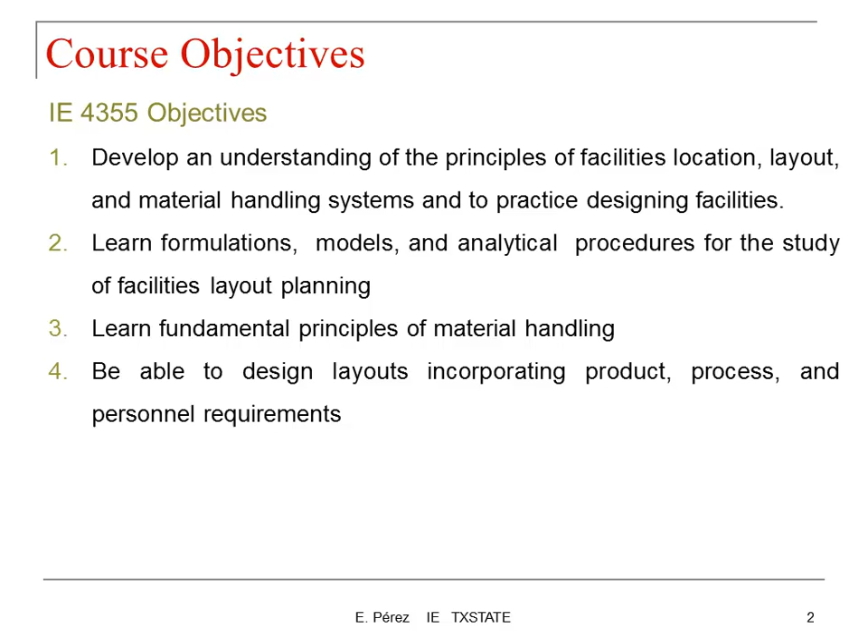So understand the principles of facility location, layout, material handling systems, and to practice designing facilities. Learn formulation models and analytical procedures for the study of facility layout planning. And learn the fundamentals about material handling and be able to design layouts incorporating product, process, and personnel requirements. So as you can see, our topic today is very related to that objective.

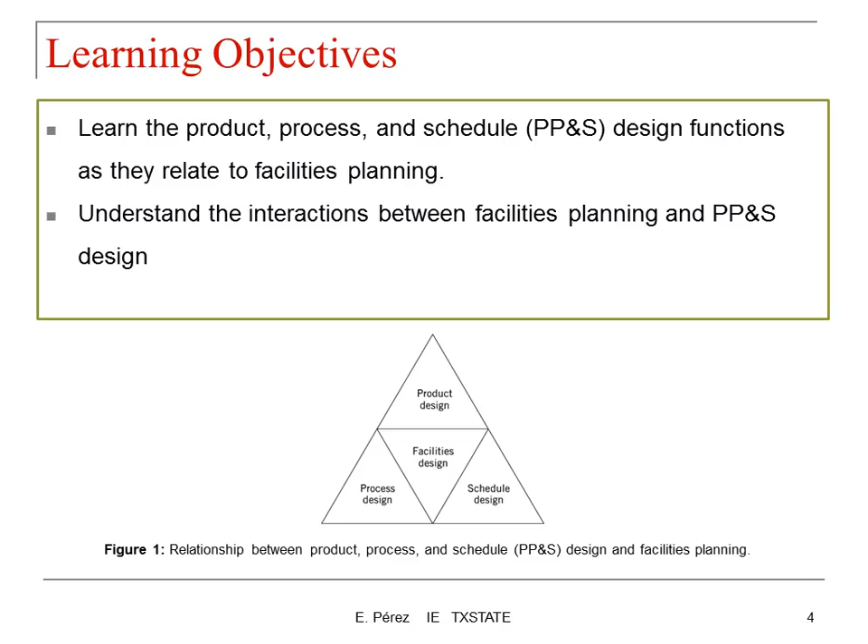So if you see this, that means product, process, and schedule, as they relate to facilities planning, and understanding the interactions between facilities planning and the product, process, and schedule design. So let's start with the product design.

So the product design involves two things. The first one is to decide which products are to be produced, and the second one is the detailed design of individual products. Okay, so these two things are related to the product design, and I'm showing here one CAD design for a cell phone. So we're going to talk about that later.

Decisions regarding the products to be produced are generally made by upper level management. And if you took project management from me or from Dr. Jimenez, we talk about this in detail in that course. Why are these decisions made by upper level management, and how are they involved in this decision making?

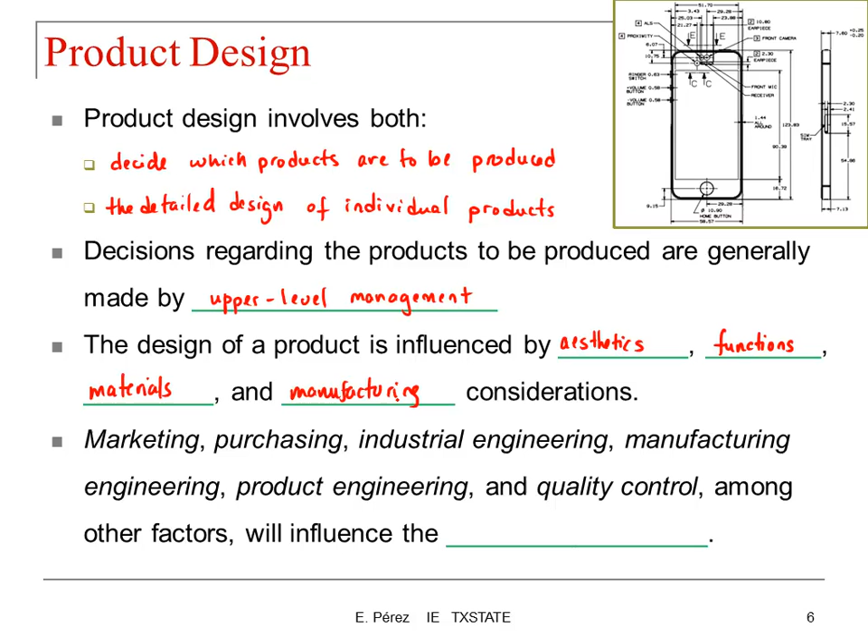That will influence how the product is produced, and can also influence how many units you are going to sell. If you are able to provide a good design in terms of aesthetics of your product, that will be easier for you to market, for instance, and so on. So marketing, purchasing, industrial engineering, manufacturing engineering, product engineering, and quality control, among other factors, will influence the design of a product.

So I want you to keep in mind what we are trying to do. We're going to be building from the building blocks up to the top level. So we want to show you how the product design, the process design, and the schedule design affects the facilities planning.

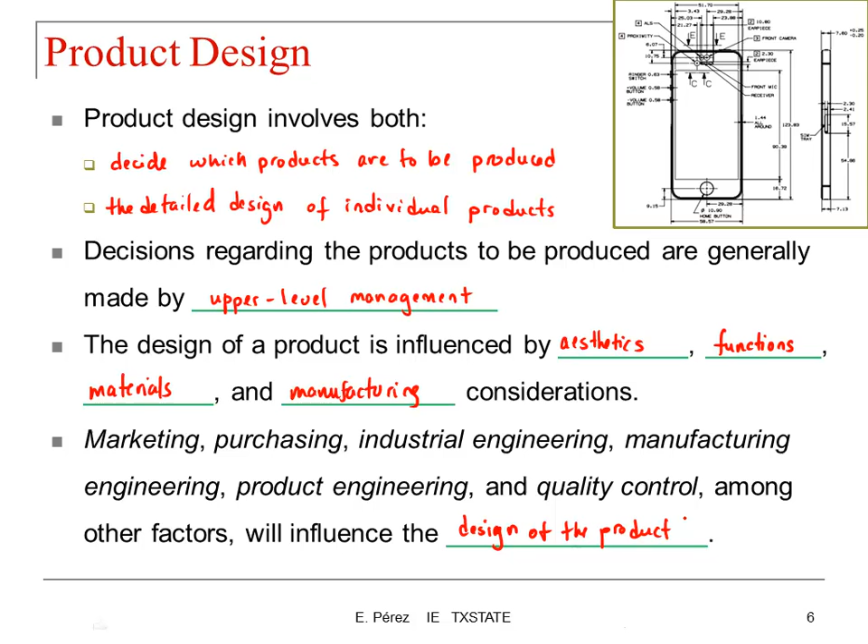In terms of product design, we can use pictorial representations and prototypes as inputs for the facilities planner. Here is an example of a drawing or pictorial representation of a particular assembly. As you can see, it's very detailed in terms of the part numbers needed to get that particular product completed, and the picture also shows you how the product needs to be assembled.

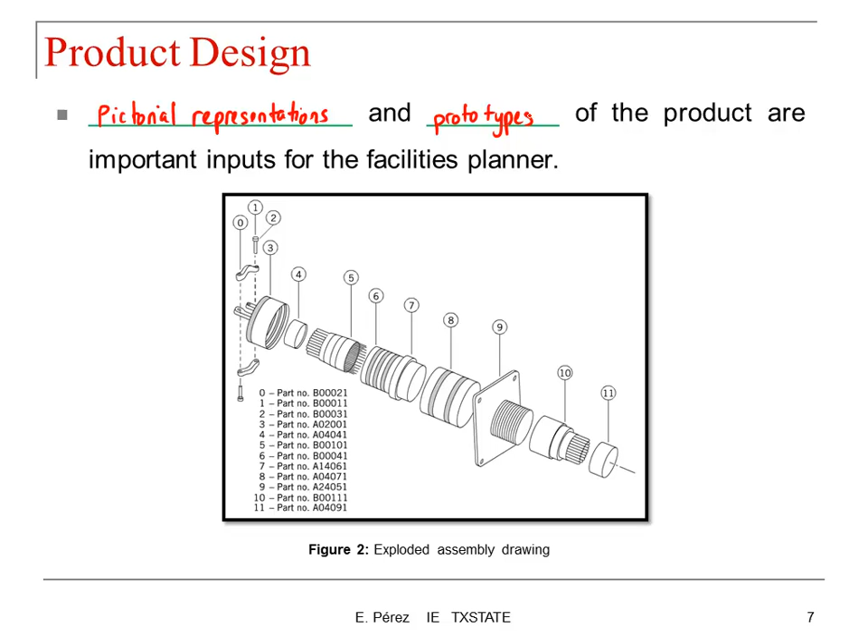Okay, so these are some of the tools that we can use. Also, photographs and drawings allow the planner to visualize how the product is to be assembled. So if you would like to see how the product itself is going to look in reality, you can also produce this type of picture for helping in the assembly of the product.

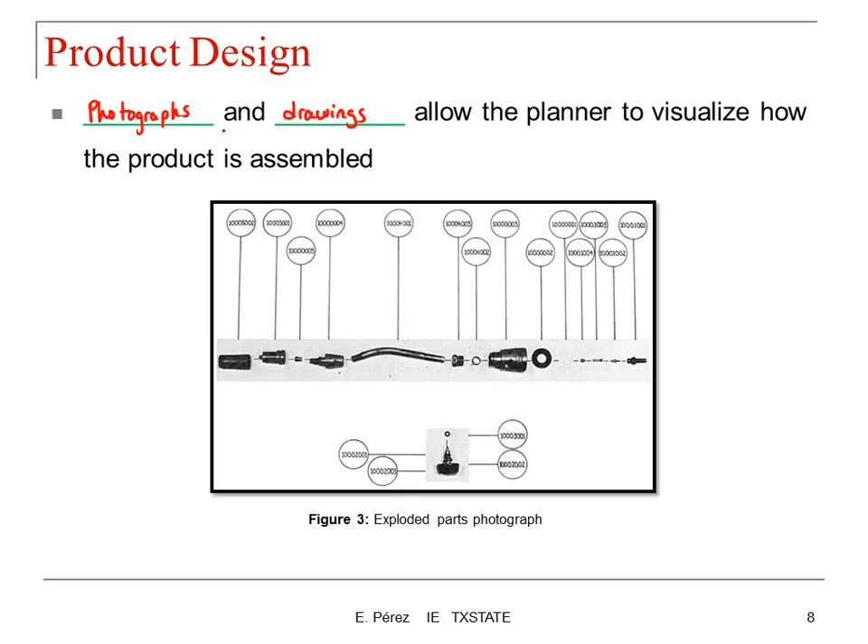As you can see, we have multiple components in order to put together this whole assembly. So detailed component part drawings are needed for each component part. Here we have 1, 2, 3, 4, 5, 6, 7, 8, 9, around 10 different components. So we also need a specific design or drawing for each one of those components. The drawing should provide part specification and dimensions in sufficient detail to allow part fabrication.

One of the decisions you have to make as a facilities planner - you saw that for this particular assembly you have 10 components. You might be able to produce some of them, you might be able to produce all of them, but sometimes you have to make decisions in terms of whether it's better for you to buy some of those components or to manufacture those components. We're going to talk about those details later in this lecture, so just keep that in mind. The combination of exploded assembly drawings and component part drawings fully documents the design of the product.

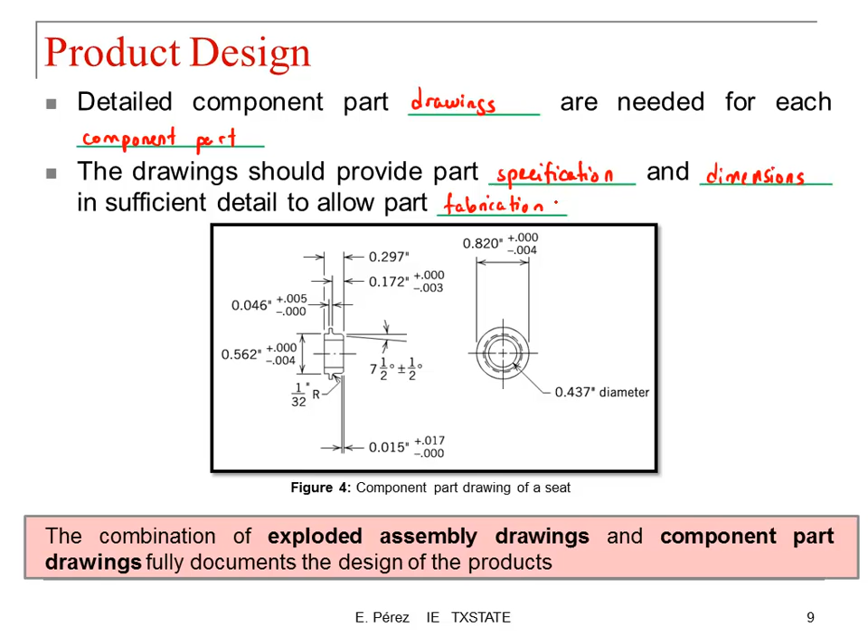Any idea how you can create this type of diagram? I don't know if any of you have experience designing or creating these diagrams using a computer. Yeah, I guess so, right? Because you take one course at the beginning of your degree that teaches you how to use CAD software. So the drawings can be prepared and analyzed with computer aided design software. When I was an undergrad student, we used AutoCAD. I don't know if that's what you're still using, but you can use AutoCAD to create these components.

Concurrent engineering can be used to improve the relationship between the function of a component or product and its cost. We talked a little bit briefly about concurrent engineering in our first lecture. Basically, instead of following a sequence of steps, you're trying to combine some of them so you can come up with a better design of your product. So functions are integrated to reduce the elapsed time required to bring a new product to market.

Concurrent engineering provides simultaneous consideration in the design phase of life cycle factors such as product design, materials, manufacturing processes, testability, serviceability, quality, and reliability.

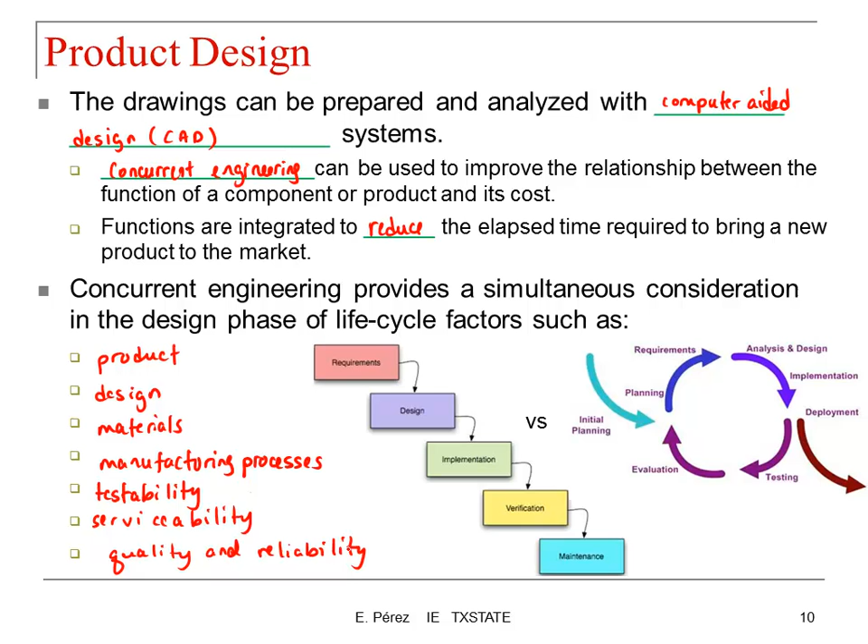So let's talk about - we talked about product design. Now we're going to transition to process design. In process design, we're going to determine how the product is going to be produced. So you have your product already, you have the idea of the product that you want to take to market. Now you have to design the process to take that product from an idea to a real product. So you have to decide, as we mentioned, we're going to have multiple components. We need to decide whether the part will be purchased or produced.

We're going to take into consideration multiple things. One of them is the cost, but also you have to take into account the time for delivery. If it's going to take a long time, even if it's cheaper, it might be better to pay a little more to get the component in a timely fashion. So there are multiple things to take into account.

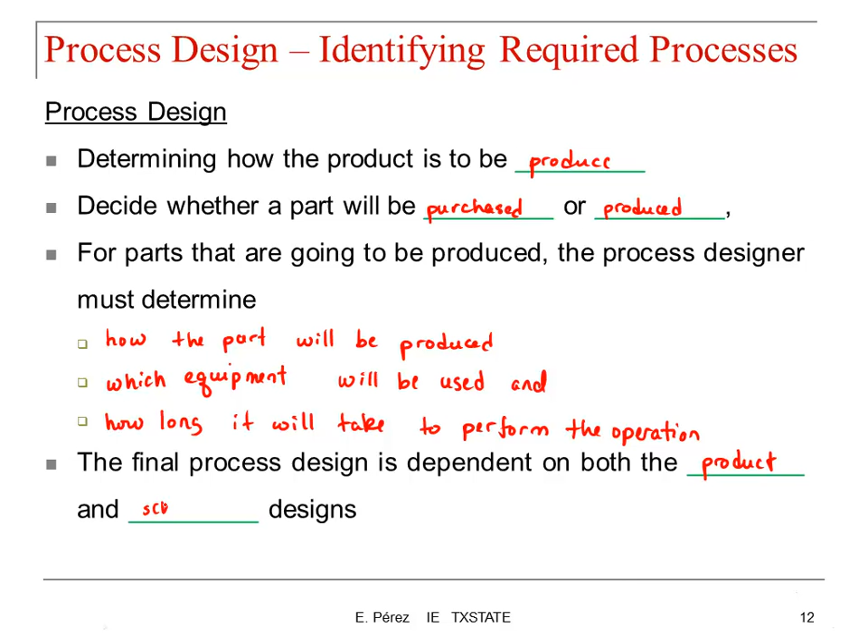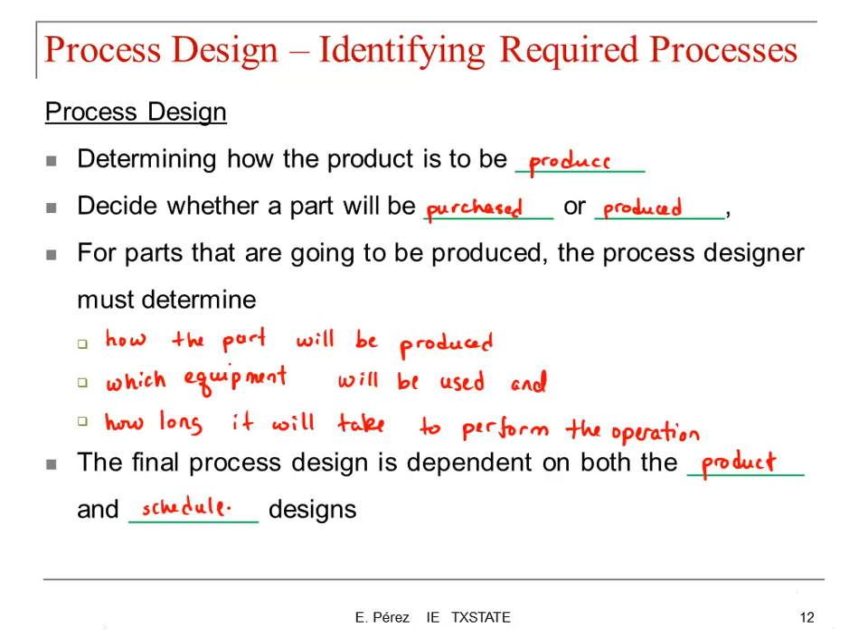In our next slide, these are some of the tools you can use to decide whether you want to produce or buy a particular component for your process or final product. So here's the make or buy decision process - a list of questions you can follow to decide whether you should buy or manufacture a particular component of your product.

If you follow the flow chart, the first question is, can the item be purchased? If the answer is no, there's nothing else to decide - you're forced to produce that component. But if you can buy that component, then you follow the flow chart.

Can we make that item? Do we have the equipment? Do we have the raw materials? Is it easy for us to get those raw materials in order to produce that component, and so on? If the answer is no, then you should buy the component.

But if the answer is yes, then you think about the cost. Is it cheaper for us to make than to buy? If the answer is no, then you buy.

If the answer is yes, then you look at the resources available - the capital available in your department allowing you to produce that component. If the answer is no, then you buy. If the answer is yes, then after answering yes to all the questions, you decide to make the component in your own company.

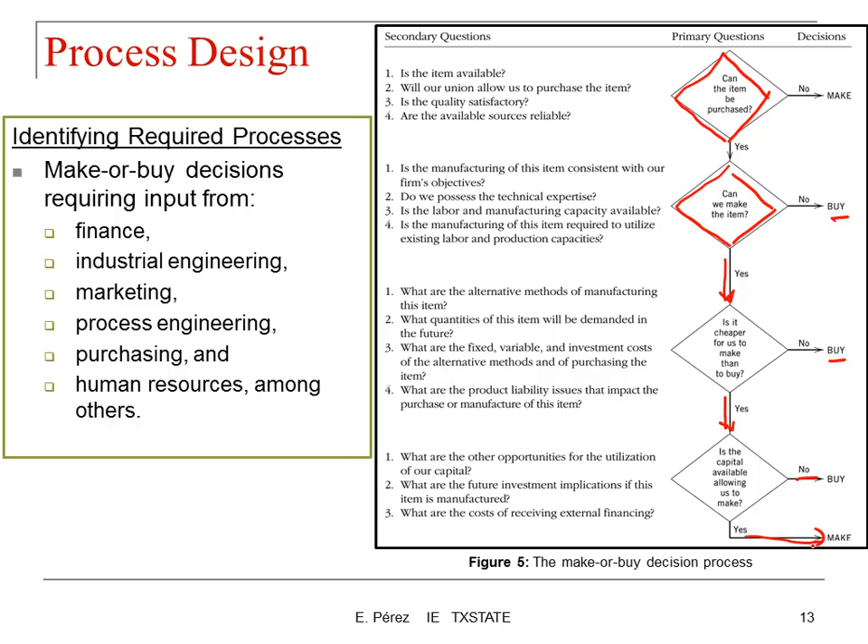The next thing I have here is called a part list. The input to the facilities planner is a listing of the items to be made and the items to be purchased. Once you've decided which components of this final assembly are going to be purchased and which ones you're going to make in your own facility, you have to provide that list to the facilities planner.

Here we have an example of a part list for an airflow regulator. We have the part number, followed by the part name. We've also listed the drawing number, so if you want to reference the design of that component, the number of units required for that assembly, the material, the dimensions, and the decision on whether you're going to buy or make that in your facility. That last column is the decision on whether you're going to make or buy that component.

So the listing takes the form of a part list, or a bill of materials.

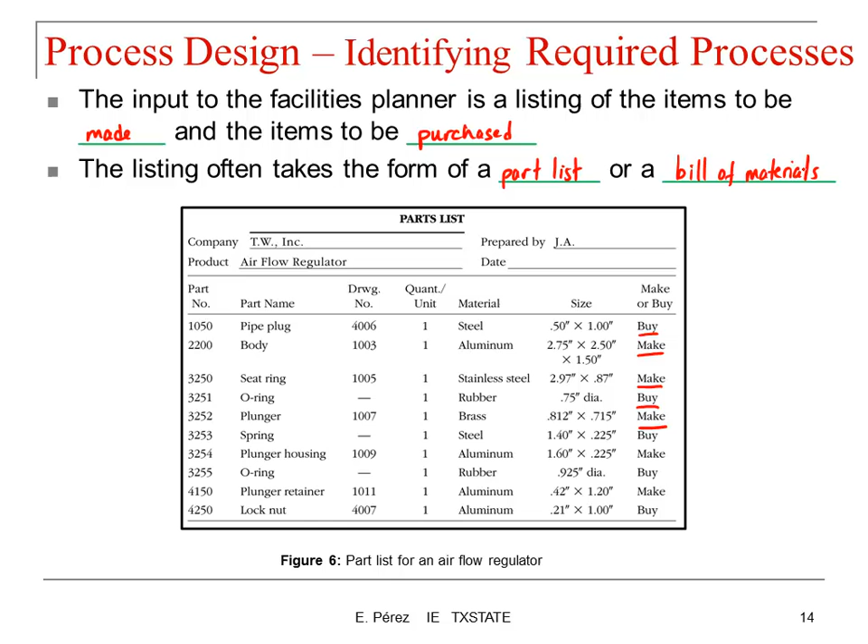On the next slide, I'm going to show you how a bill of material looks like. A bill of materials is often referred to as a structured part list and contains the same information as the previous document, the part list, plus information of the structure of the product.

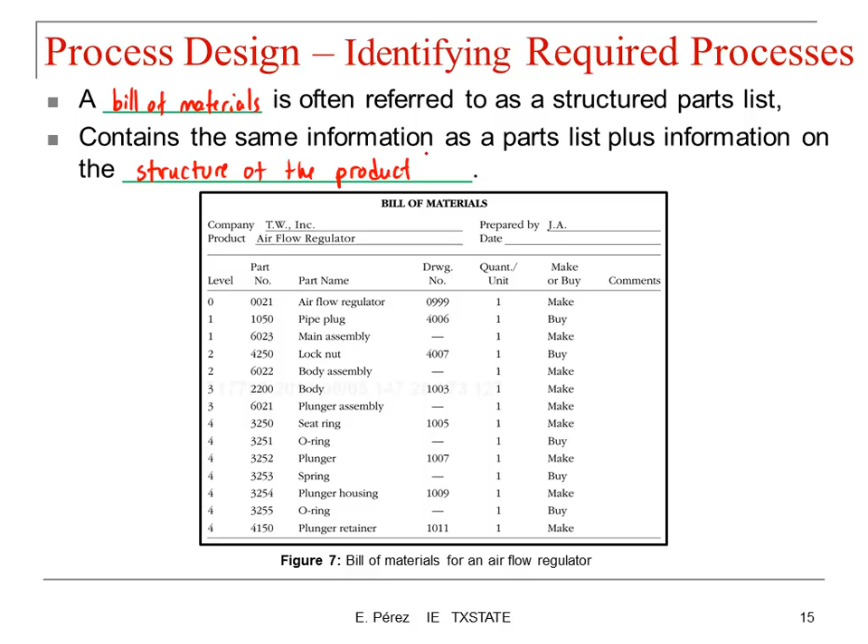That basically refers to this first column, which essentially is telling you the level in terms of how to build the component from the basic blocks up to the final assembly. Level 0 is the basic level. You go level up, you require some components to assembly that level, and so on.

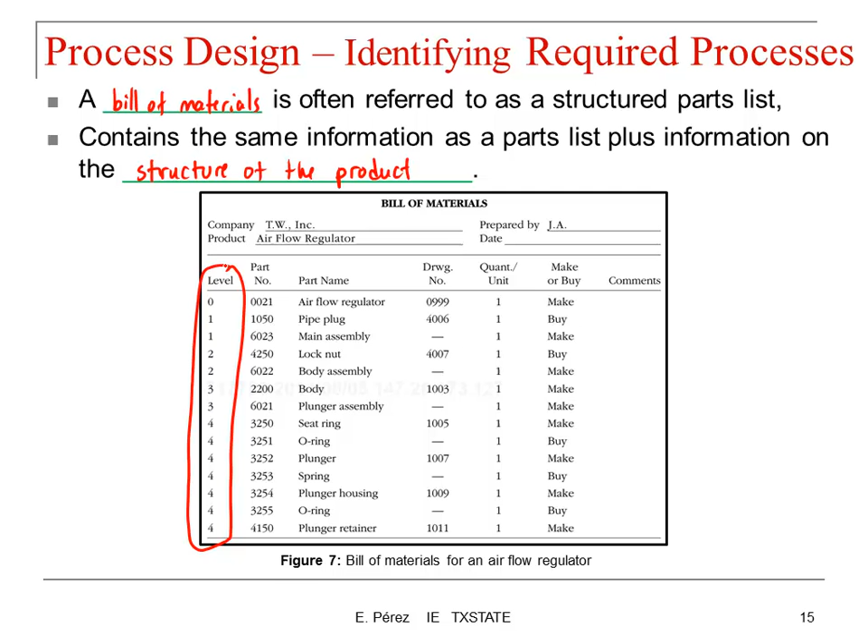Typically, the product structure is a hierarchy, referring to the level of product assembly. Level 0 usually is the final product. Level 1 applies to subassemblies and components. Level 2 refers to the subassemblies and components as they feed the first level, and so on.

I think I told you the opposite on the previous slide. We go back to this: level 0 is the final assembly. This is usually represented as a single line. So if we go back here, that should be only one line - that's your final assembly. Level 1 contains some of the sub-assemblies.

If you see this one is by itself right here, that might be because that's an assembly that is purchased from a supplier. But here you see how this main assembly contains multiple components at different levels. I think you have seen this in some of your courses already, maybe for production planning, but all those ideas discussed in previous courses are going to be reflected here because we need all that information to design our facility.

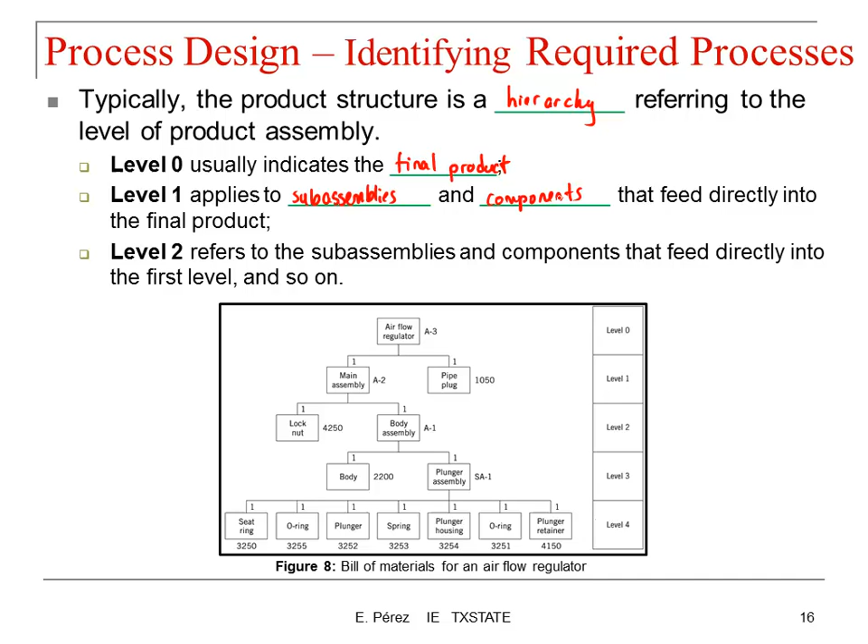So once a determination has been made concerning the products to be made in-house, then decisions are needed as how the product will be made. We already made the decisions in terms of which parts are going to be purchased and which parts are going to be manufactured. Now we need to decide how we are going to assemble or produce this final product.

So the process selection procedure involves the following steps. First, define the elemental operations. Second, identify alternative processes for each operation - you might have multiple ways to produce a particular part.

For example, when I was working for Johnson & Johnson, we had a manufacturing line to produce a certain type of Tylenol, but we designed a new process that would cut the space requirement for that final manufacturing line to half. We were experimenting with that in a different area, and actually we were able to produce the same product with the same quality. That means you can change that production line to require less space from your production facility. So there might always be different ways to process a particular operation.

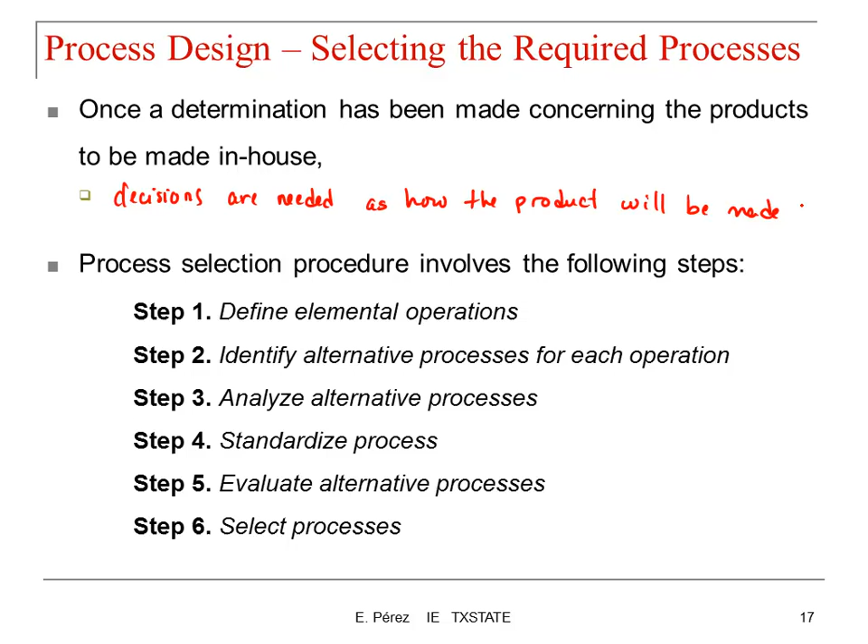In terms of selecting the required processes, the facilities planner will not perform process selection. That's not a decision made by the facilities planner, but an understanding of the overall procedure provides the foundation for the facilities plan. Once that information is provided and you have a good understanding of it, then you can start planning for the facility.

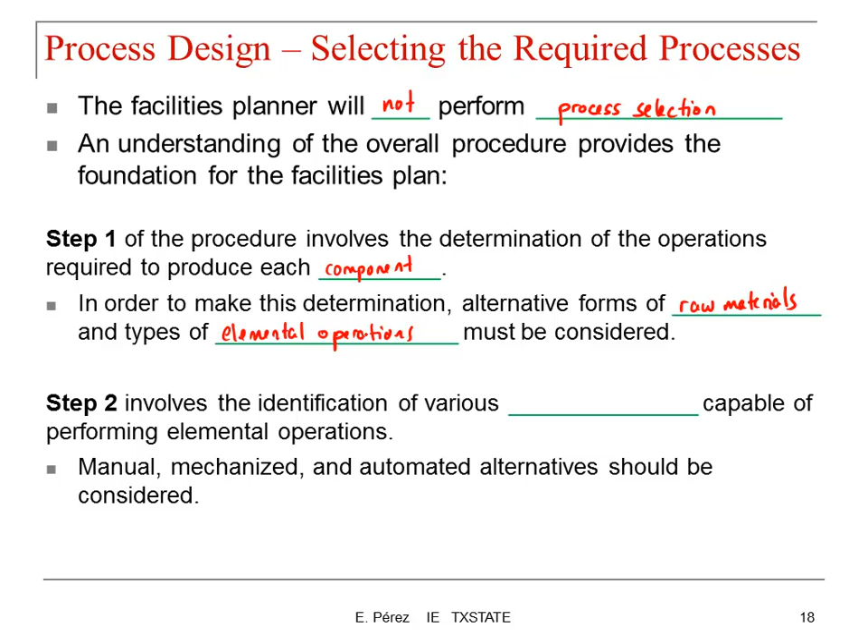Step 1 of the procedure involves the determination of the operations required to produce each component. In order to make this determination, alternative forms of raw materials and types of elemental operations must be considered. Step 2 involves the identification of various equipment types capable of performing elemental operations.

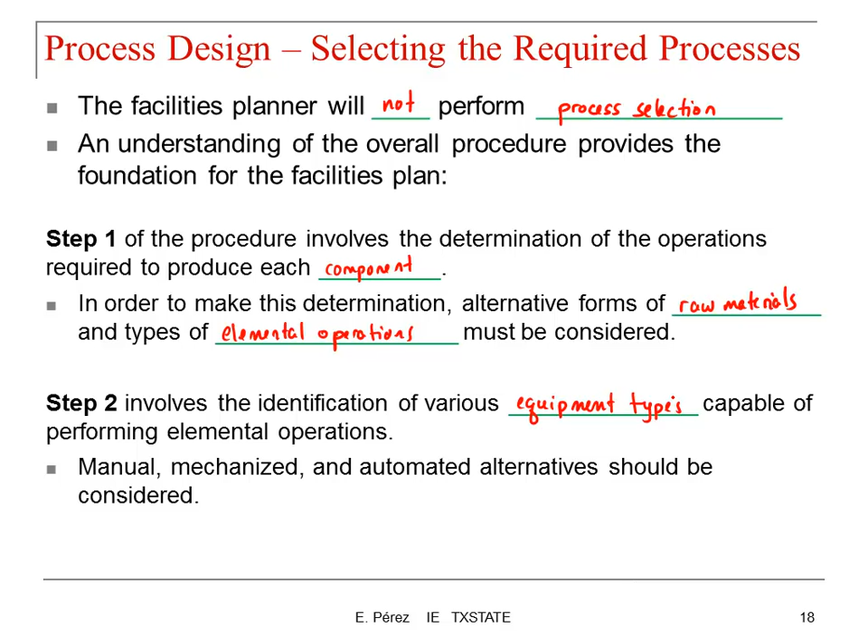This doesn't necessarily mean that you need to buy new equipment. If you have an area of your facility that's underutilized, you can always use those resources, or try to make them part of this new process. Manual, mechanized, and automated alternatives should be considered. Once more, the facilities planner will not make process selection, but we need to have a good understanding of the overall procedure - that's the foundation of the facilities plan.

So step number 3 includes the determination of unit production times and equipment utilization.

For various operations and alternative equipment types, the utilization figures are inputs into step 4 of the procedure. Step 5 involves the economic evaluation of alternative equipment types.

This is another course from your degree showing up here: economic evaluation, economic analysis, the use of net present value, and different types of analysis to make the decision at time 0. The results of the economic evaluations are the basis for the final step, which is step 6.

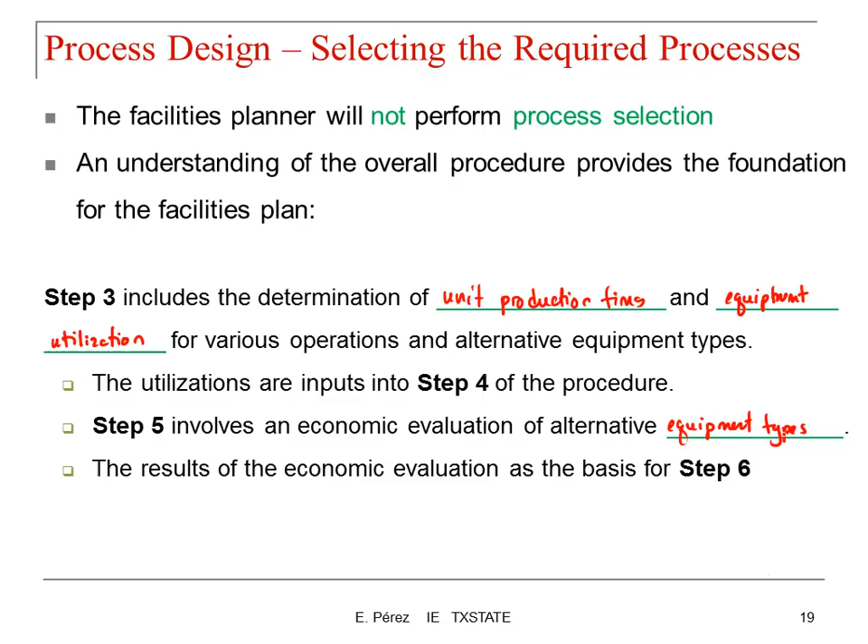So as you can see, this involves a lot of things. The output from the process selection procedure are the processes, equipment, and raw materials required for the in-house production of products. And this output is given in the form of a route sheet.

Unit times: if you need to prepare the machines to produce that particular component, do we have a setup time? Do we have a maintenance time? How long is it going to take to complete each unit? And finally, the raw materials requirement.

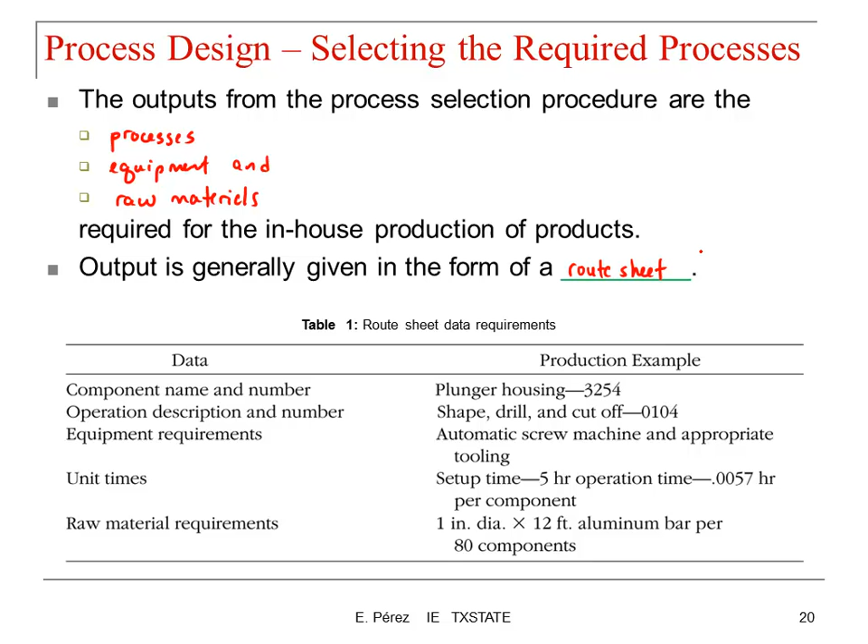Any questions? So we're still talking about process design. We talked about the requirements for the route sheet, and on the next slide we have an example of a route sheet.

So again, this is a standard form used in manufacturing and production. This is called a route sheet.

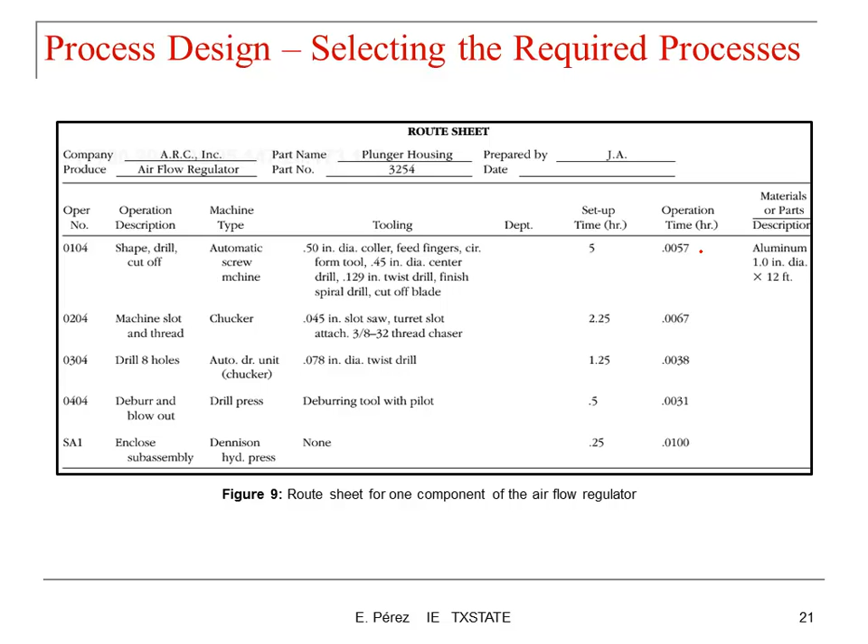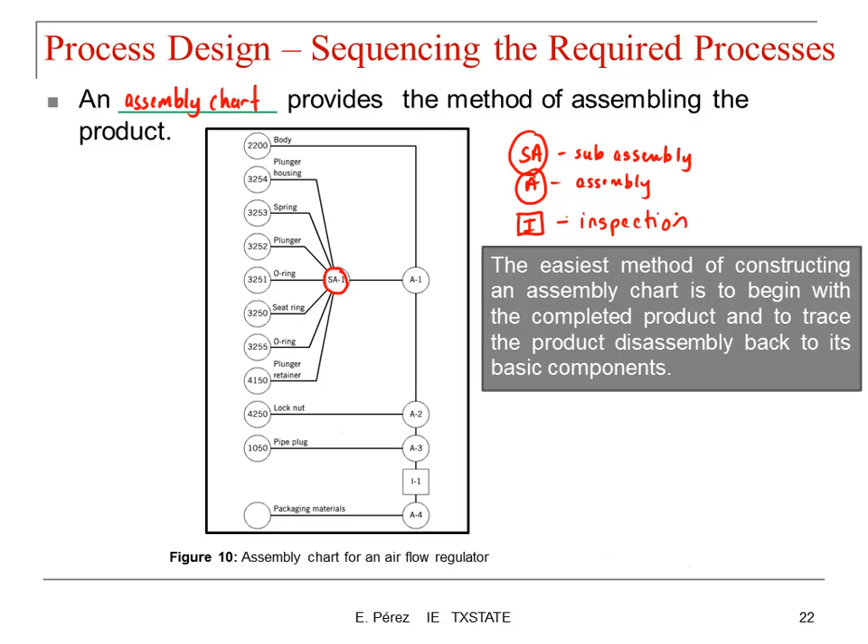An assembly chart does not provide the overall understanding of the flow within the facility, but by superimposing the route sheet and the assembly chart, we get a result that does give an overview of the flow, which is called the operation process chart.

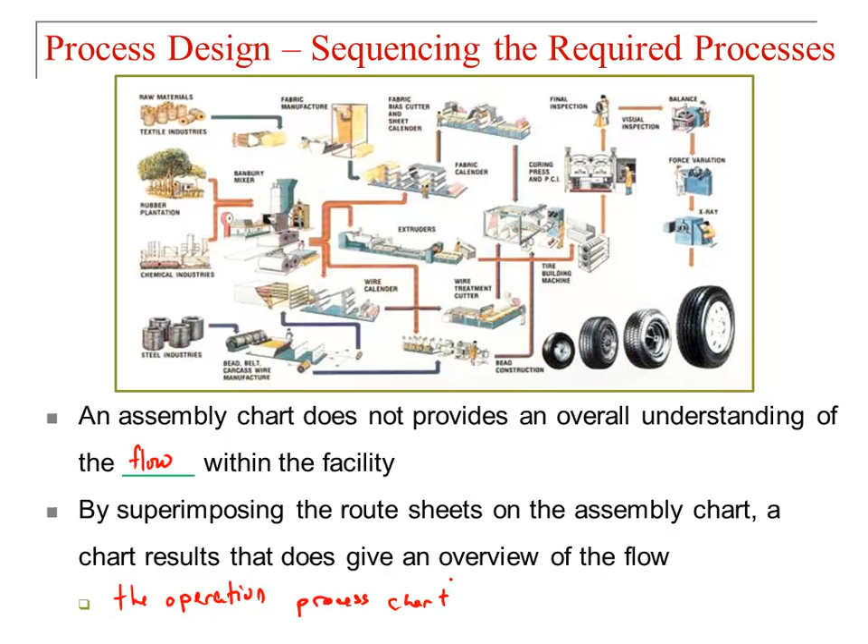Going back to the diagrams, we have one called the route sheet and another called the assembly chart. The assembly chart doesn't give you information about the flow within the facility, but we can use the route sheet in combination with the assembly chart to come up with a new type of chart that provides information about the flow. That chart is called the operation process chart, and that is right here.

To construct this operation process chart, we begin at the upper right side of the chart with the components included in the first assembly operation. If the components are purchased, they should be shown as fitting horizontally into the appropriate assembly operation, so that'll be the products showing up in the horizontal position.

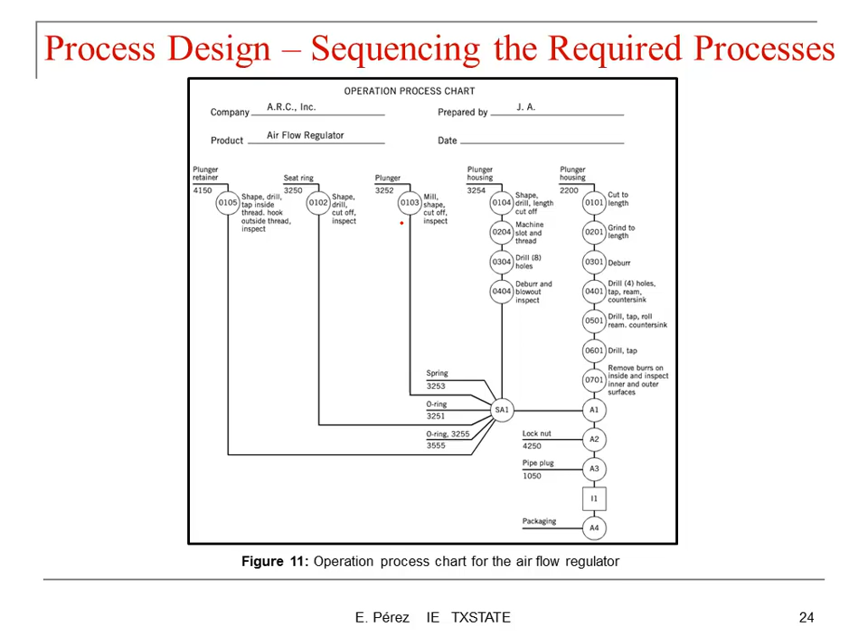So these are those: plunger retainer, seat ring, plunger, and so on. If the components are manufactured, they should be shown as fitting vertically into the appropriate assembly operation. The operation process chart may be completed by continuing in this manner through all the required steps, until the product is ready for release to the warehouse.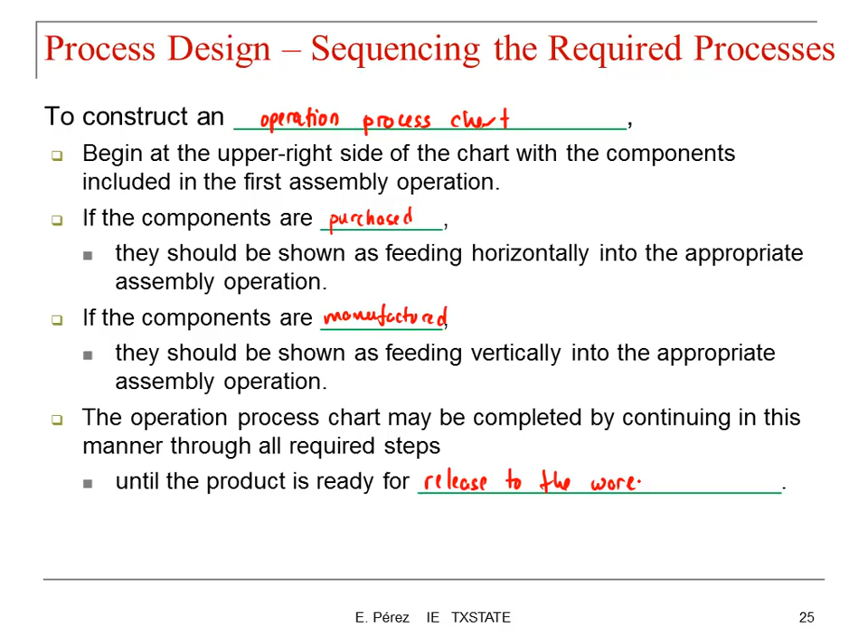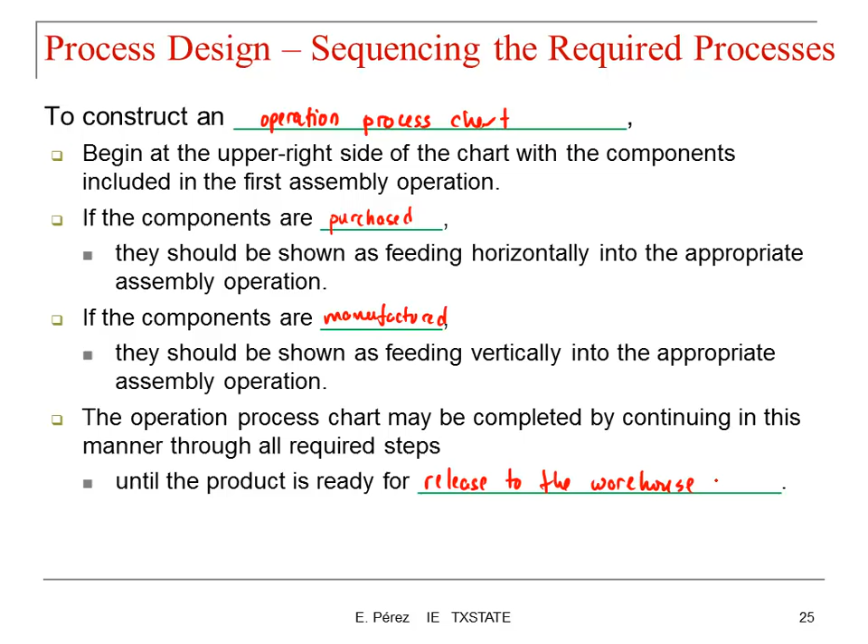If you took operation research, we talked about network flow charts, how to construct a network, and how to use a network to find a solution to a problem. We can use those concepts to design a new type of graph — a second viewpoint, based on graph and network theory — to interpret the chart as a network representation.

So when I talk about a network, this is what I'm talking about: a graph that looks like this. You have some arcs and some nodes, and you can, say, look at the shortest path — find the shortest way to go from one node to the other, and so on. That's network representation.

The precedence diagram is a directed network and is often used in project planning. I'll give a bonus point to anyone who can tell me what a directed graph is — that's for the first exam. Does anyone remember what a directed graph is?

We can have a graph or network that looks like this, say with four nodes, with arcs meaning you can move from this node to this one and back with no problem. But in a directed graph, you have arrows meaning the flow is only in one direction. So that's what we're talking about here.

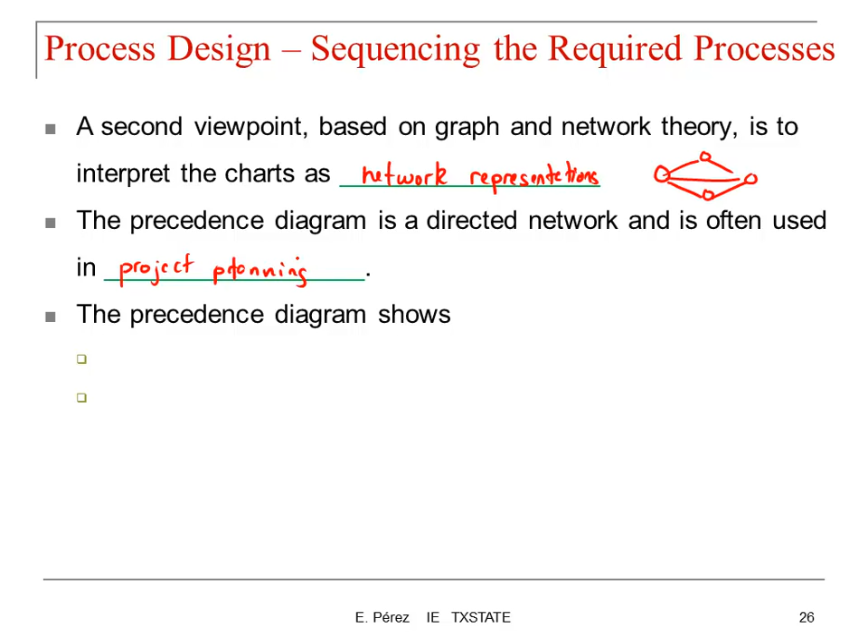The precedence diagram is a directed network, often used in project planning. It shows part numbers on the arcs and denotes operations and inspections by circles and squares.

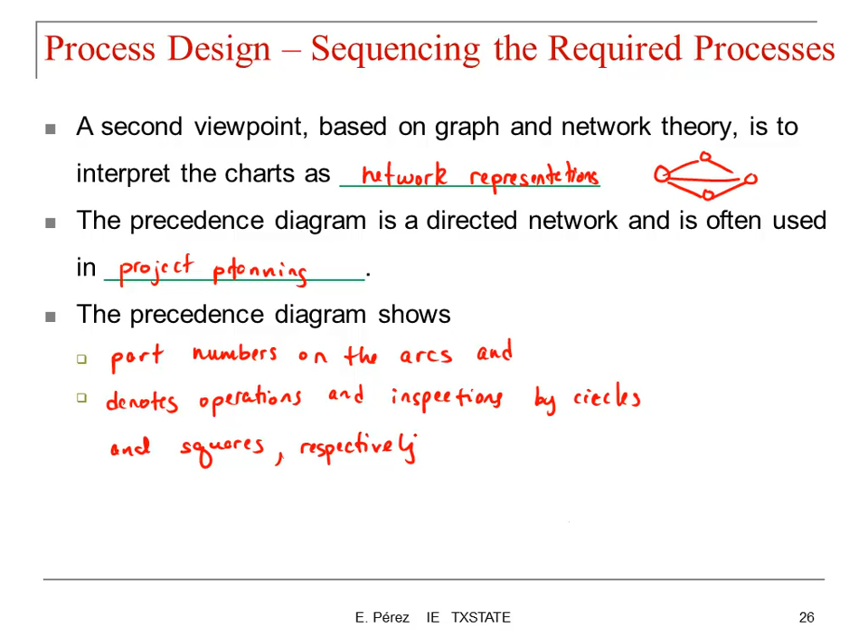So in the next diagram, showing one of those precedence diagrams — remember, this is a directed graph, so you can only go in this direction until you get to the final product. A question: why doesn't that have arrows, and why does this other one have arrows in the graph? Well, you don't have to show the arrows, but you need to know it's a directed graph, meaning the final assembly will require the components going in this direction.

Any other questions? A good question. Okay.

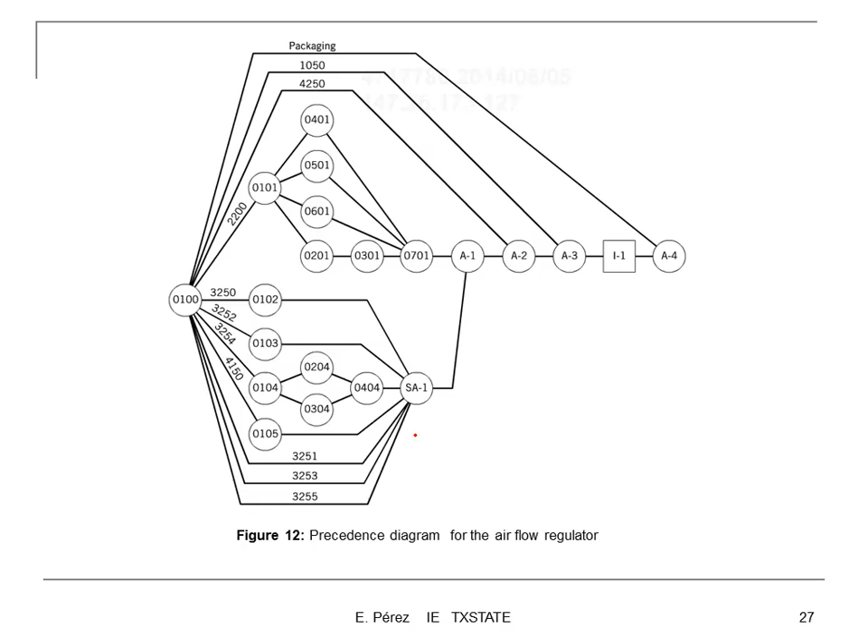Okay, so the last thing that we're going to discuss today is schedule design. So we talked about product design, process design, and now schedule design. Any ideas of what we're going to be trying to do in the schedule design? When you hear the word schedule, what comes to mind? Yes. Time frame for the product. That could be one thing. Building the time frame for the product. What else? If I ask you, what's your schedule for this week? What are you going to tell me?

When you're going to class. Exactly. So you go to class these times. If you're working, you go to work these times. So that's the type of decisions that we are going to be making now. How many units, at what time, how many machines are going to be used, and so on. So we're going to talk briefly about the schedule design. We're going to come back to these later in the semester. But we can start talking about how many units do you need to start producing if you want to get an output of 1,000 units by the end of the week. That type of thing. Okay?

So schedule design provides answers to questions involving how much to produce and when to produce. Production quantity decisions are referred to as lot size decisions. And determining when to produce is referred to as production scheduling.

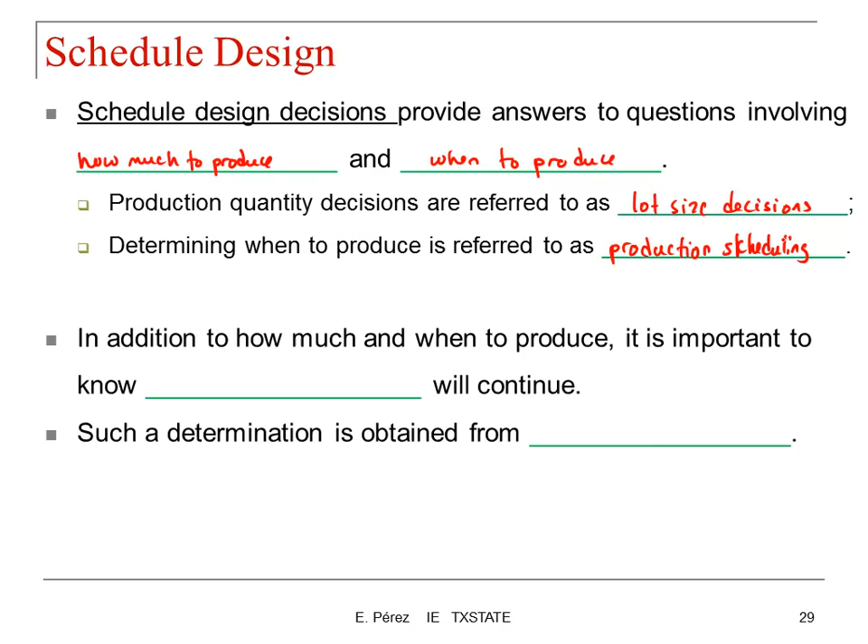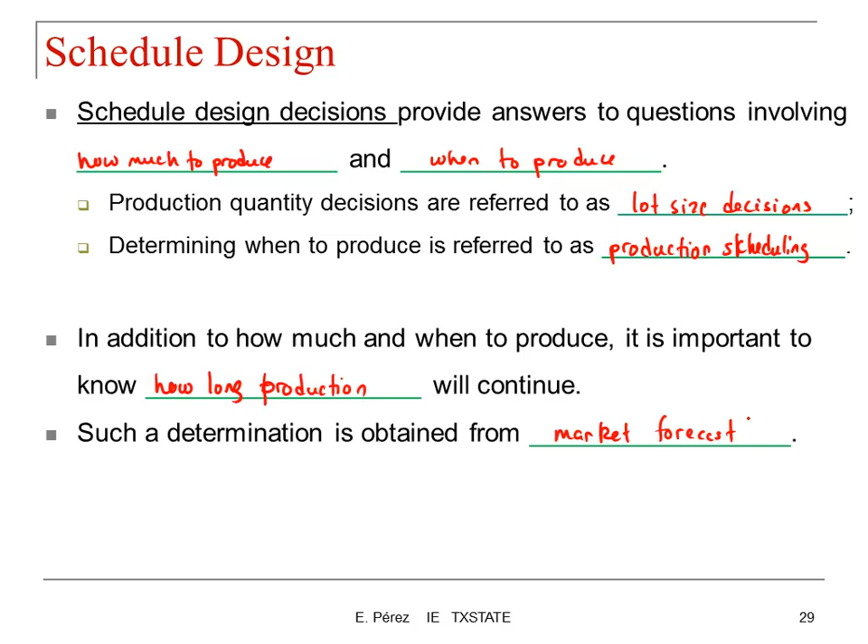In addition to how much to produce and when to produce, it is important to know how long production will continue. And such a determination is obtained from market forecast. So if you're coming with a new cell phone design, let's say the iPhone 6, you want to know for how long you are going to be producing this new product, because you know that at some point you're going to come up with some new ideas and design a new product. So the production of such an item will not continue forever. So that's the type of decisions that you need to make, and you need some market information as well about the product.

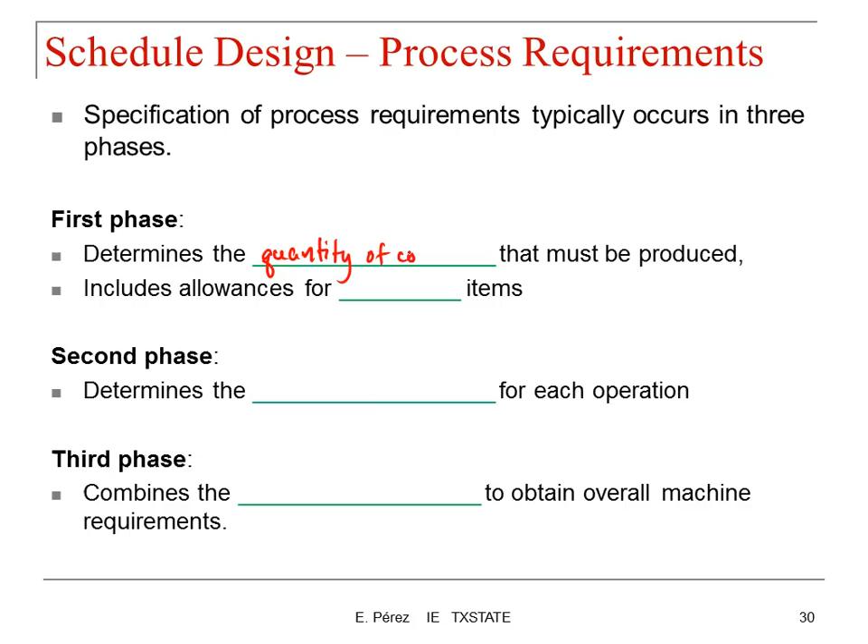So specification of process requirements typically occurs in 3 phases. The first phase determines the quantity of components that must be produced and includes allowances for defective items. Okay, so you don't want to send a defective item to the world. You want to make sure that you check if you have a lot with multiple defective items, and you want to make sure that if you are guaranteeing 1,000 units to your customer, all those units are good units. So you have to take into account you will always have some defective items. You might be able to discard those, or you can fix those, and we're going to talk about that in a few minutes.

The second phase determines the machine requirements for each operation. And this second phase, we're going to discuss later in the semester. For now, we're going to focus only on the first one. And the third phase combines the operation requirements to obtain the overall machine requirements. So in this step, we look at specific operations. Here we're looking at the overall, or the final assembly, how many machines, how many units, and so on.

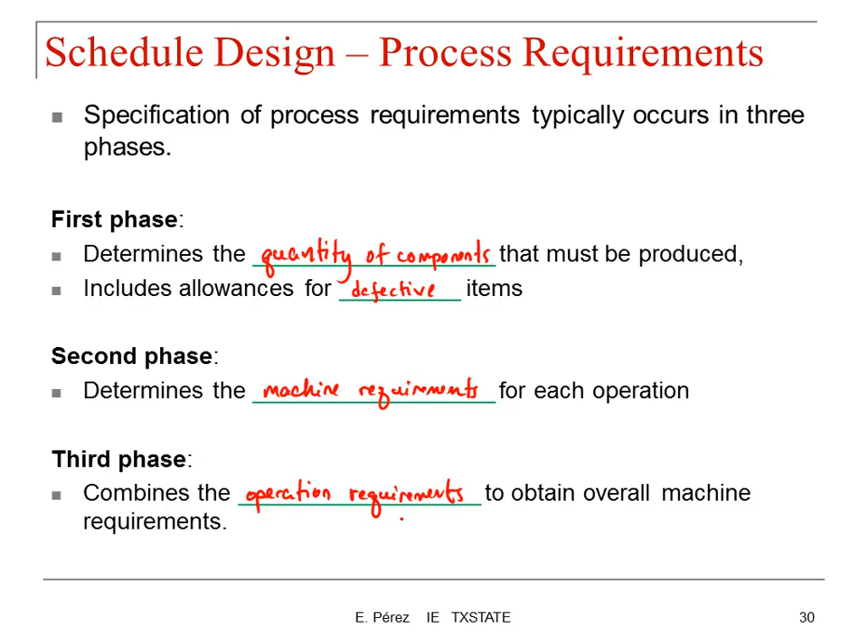So in terms of the first phase, quantity or the production requirements, taking into account the defective items. The calculation of production requirements. So we're going to look at what's the input in your manufacturing line. How many units do you need at the beginning to end up with the required amount that you need to satisfy the requirements for your customer? So if you want to produce 1,000 units, you might need to start with an input of 1,100 units, because 100 of them could be defective. So that's the idea.

So we're going to use some notation here. DK represents the percentage of defective items produced in each one of the operations. OK is the desired output without defects, and IK is the input for your production. Okay, so we can derive an expression to compute the input based on the output. So if you have an output required of 1,000 units, you can compute that output using the input minus the defective units that you're going to have.

Simple math. And you can solve for IK and get an expression in order to determine what will be the input required for your process. So this is actually the expression that you're going to use. So you're going to determine the input for your process using the output required and also the predicted number of defective units that you're going to have.

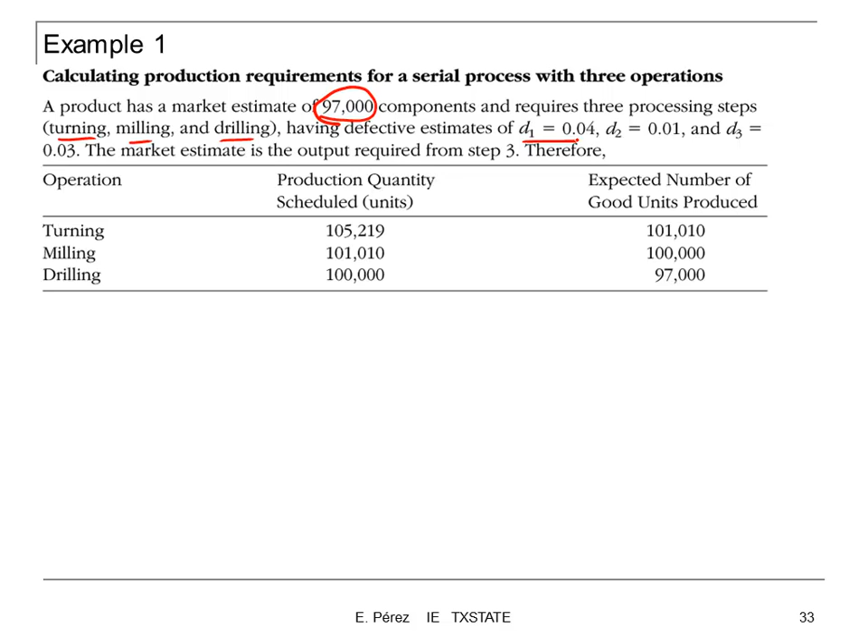So we have 3 processing steps: turning, milling, and drilling, and we have defective estimates of 0.04 for the first operation, 0.01 for the second one, and 0.03 for the third one. Okay, so I'm already giving you the answers here for this problem, but I want you to see in detail what's going on. So this is what we're trying to solve.

I'm going to represent this using a network. We have one process, we have a second process, and we have a third process. So we're going to have an input for the first process, and we are trying to find out what that input is. And we have an output required based on market of 97,000 units.

But after each operation, we know that we're going to have some defective units. So that will go out of the process. So we have defective 1. So by combining this and this, you can know what's going to be the input of the second operation. So we're going to have second input. We don't know what that is yet.

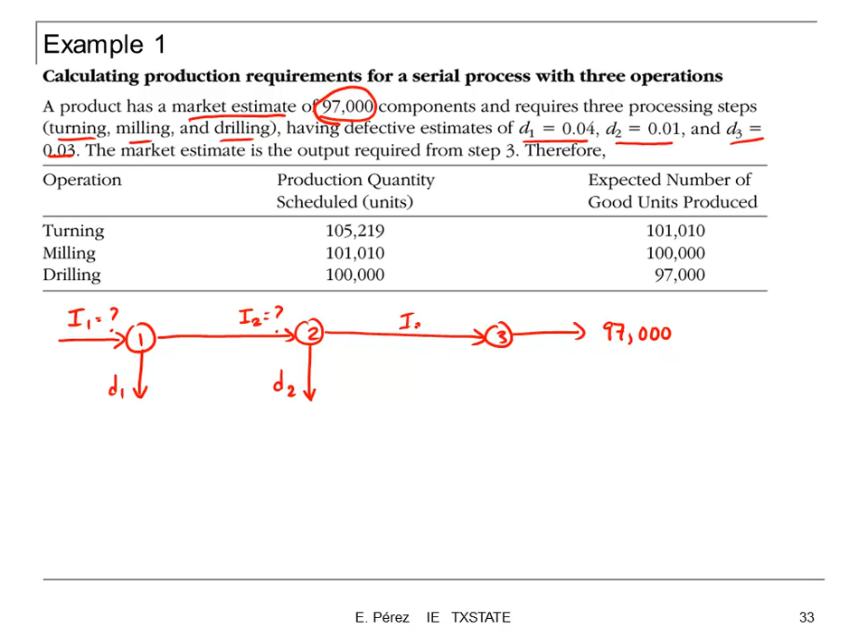But from here, we're going to have another set of units that are defective. And we're going to have a third input. We don't know what that is. But we know for sure that there's going to be some defective units also leaving that node. Okay, so what we are trying to find out is if we want to get this number of units at the end of the process, how many units should we start with? Or what should be the plan in terms of the first input?

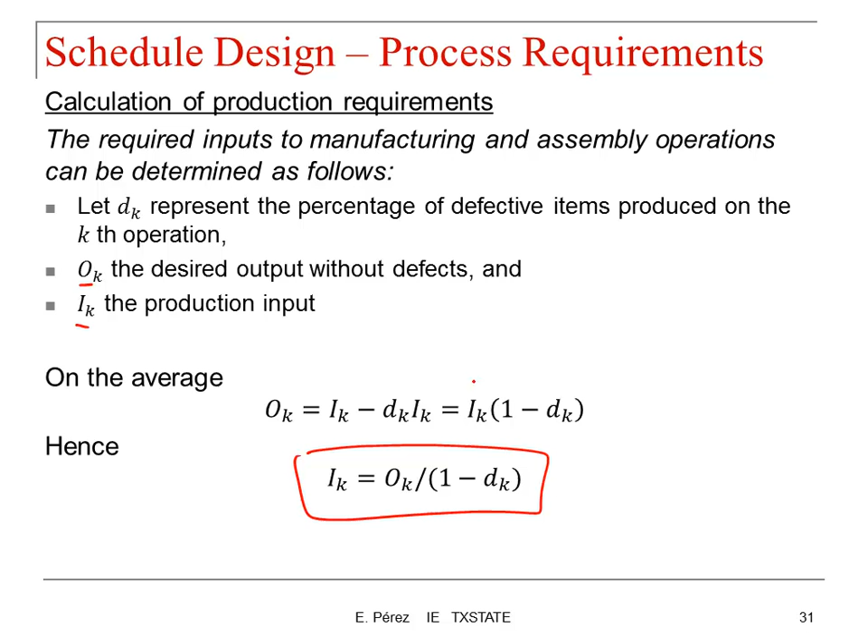So in order to get to that number, we need to go backward and compute I3, I2, and finally I1. So we can compute I3 going back to this using this expression. So I3 is going to be equal to 97,000 divided by 1 minus D3, which in this case is 0.03. And this equals 100,000 units. So I3 is 100,000.

Now we can compute I2. So we know I3. So this should be 100,000 divided by 1 minus D2, and D2 is 0.01. So this equals 101,010, and that's going to be our I2.

And finally, we can compute the initial input, I1, using the information from I2. So I1 is going to be equal to 101,010 divided by 1 minus D1, which is 0.04, and this is equal to 105,000 units. Which is that number.

So as you can see, the table is giving you these results. You have 97,000 right here. Then you have 100 and 101. And then your final input is this amount. We can also compute this in a different way. So as I mentioned, if you consider each operation independently, you can use this expression. But if you want to consider them all together, you can use this expression and get the same result.

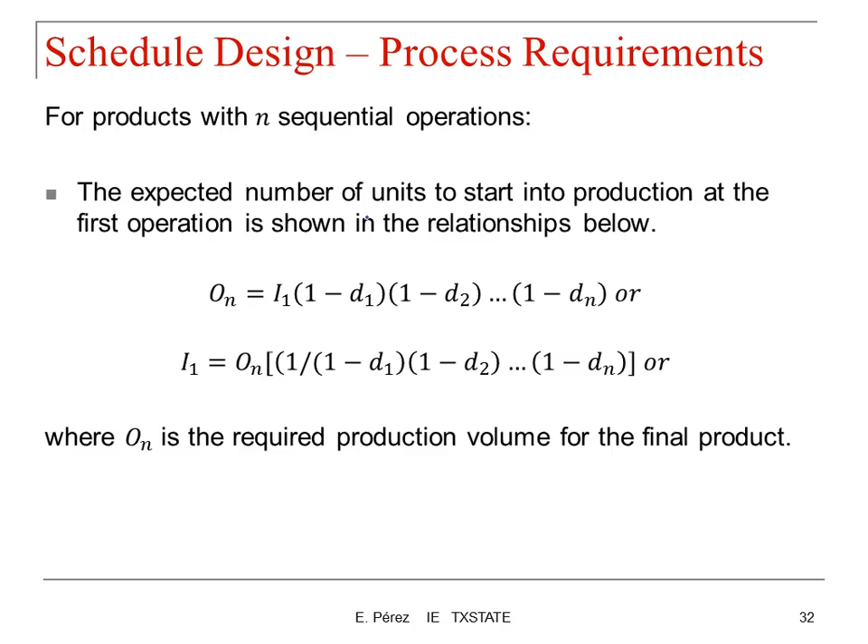So if we do that, we are gonna look at this. So I1 is going to be equal to 97,000 divided by 1 minus 0.03 times 1 minus 0.01 times 1 minus 0.04, and that should be equal to the same number. Okay, so two different ways of computing the same thing.

In this example, we are not considering rework, meaning that we can use these defective units and repair them and bring them back to the next sequence. We're just taking into account the good units. We're going to talk about rework in the next lecture. Any questions?

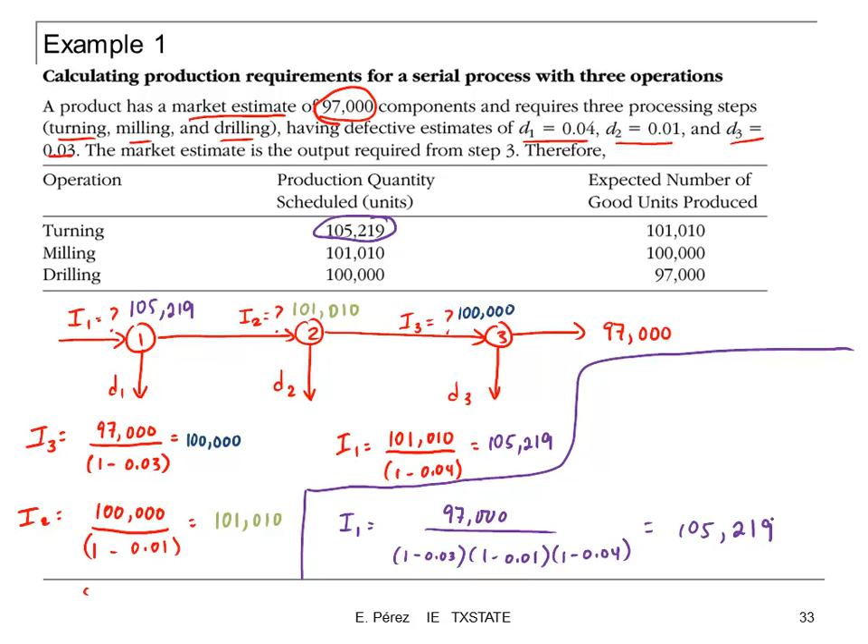For turning in that homework, we just need to have it to you by like 5 o'clock today? Yes. Okay. And you can print that right away. It will take you like 2 or 3 minutes. Okay. It won't be something that you need to think about. There's information about yourself. Okay? Thank you.